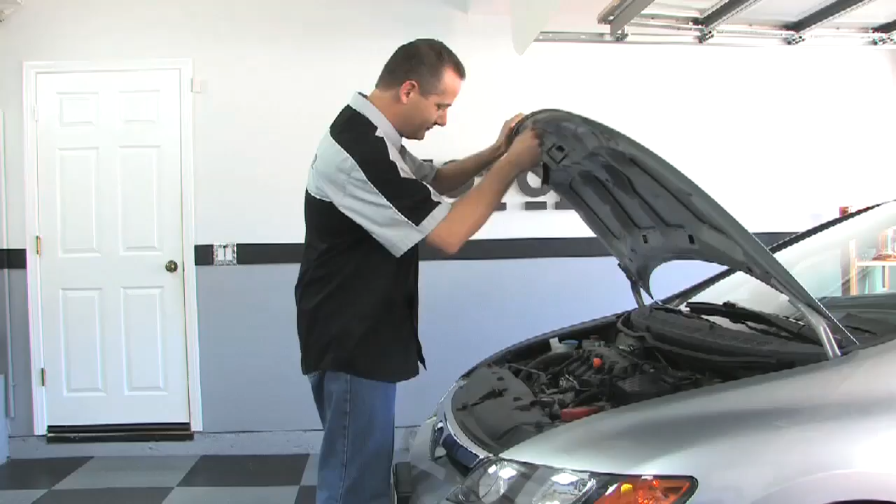Welcome to Motorz. Today we're going to be doing something a little bit different, focusing on the single most important part of your engine: your spark plugs. Yep, those little 3-inch plugs you rarely think about that make it all happen. Now you've got an engine and you've got fuel, but nothing gets done until that spark goes off, and then all the magic happens.

As part of your vehicle's maintenance plan, you need to change your spark plugs every 50 to 100,000 miles or so on most newer engines. This really depends on your ride, so you should check your owner's manual for the manufacturer's recommendation. Now we're going to take a look at a 2008 Honda Civic that has some miles on it and check its spark plugs to see if they need to be replaced.

There are some clear signs that a plug needs to be replaced or just needs to be cleaned, so I'm going to show you how to inspect a plug, but also clean it if it can be salvaged. We're also going to show you how easy it is to replace the spark plugs in your vehicle, so when it comes time you can save a little bit of cash by doing it yourself. This also may be a good time to upgrade with performance plugs. Now finally, we're going to look at some alternatives to the traditional spark plug, different metals and newer designs.

But first, let's pop the hood on our Honda and see what's involved in removing the current spark plugs. For the spark plug removal, the only tool you're going to need is a 13/16 or a 5/8 deep socket with a ratchet and an extension.

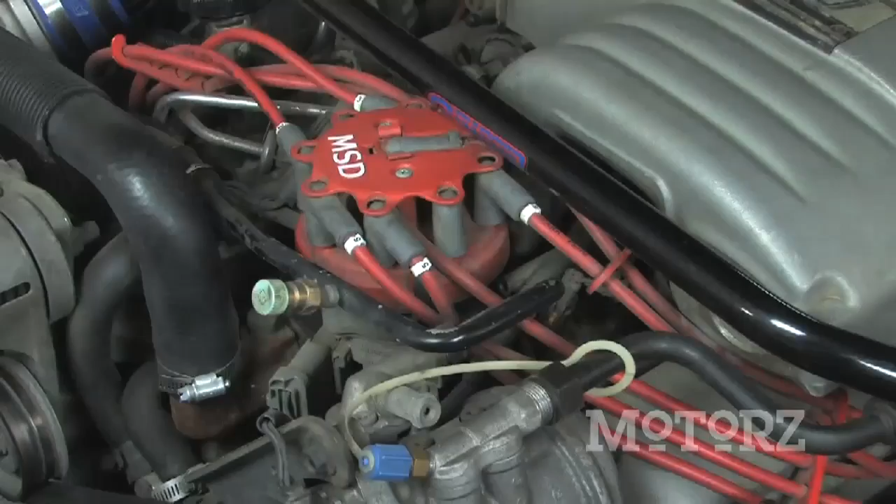Well, it looks like our engine's cooled down, so we can finally get to work. Now, if you have an older vehicle with spark plug wires and you have hard to reach spark plugs, then you might want to consider picking up a spark plug wire puller, just like this one. Or you can just wiggle your hand in and grab the boot, not the wire, and give it a good tug. It should pop right off. The puller is a great idea as it reduces the risk of damaging the spark plug wire.

Now if you're working on an older vehicle with spark plug wires, once you've got them off, take a look to see how much dirt, grime, and oil is around the plug. If it's real bad, just wipe it away. Just be sure to move it away from the spark plug cavity so that you don't risk tapping any of it into the chamber once you have that spark plug out. Another tip is to use compressed air to clean up the area. Just be sure to wear safety glasses.

Now in the case of our Honda Civic here, we just need to remove these 4 coils, and that requires the use of a 10mm socket with an extension. Once you have those off, you'll have direct access to the spark plugs.

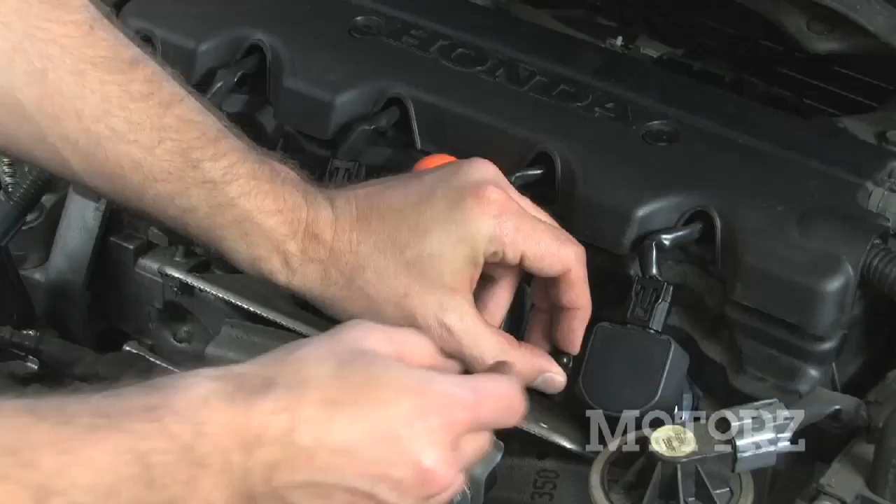Now to remove our coils from our Honda Civic, again we want to do them one at a time. We need to disconnect this wiring harness. Just press on the black tab, and that comes right out just like that. Next, using a 13/16, or in our case on our Honda, it's a 5/8 deep socket with an extension, you can remove the spark plug from the cylinder head by slowly turning it counterclockwise. Now, if you're in a really tight situation, you can also use a swivel joint to help you out.

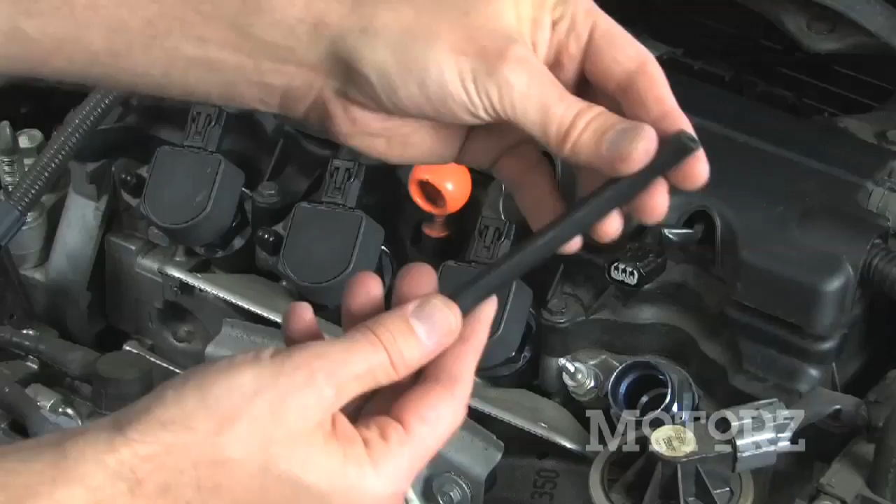Now, if your plugs feel like they've been seized into your engine or just real difficult to remove, grab some penetrating oil to loosen them up. Whatever you do, don't use a breaker bar or put a lot of force on it. If you do, you could cause a lot of damage to the head or the plug. Now for recessed spark plugs like our Honda Civic hidden beneath coils or an ignition coil assembly, you'll need to use a piece of rubber hose to grab them and pull them out.

Another tip is to put some electrical tape around your socket and extension just to make sure the socket doesn't pop off the extension and get stuck down into that cavity. Some sockets, specifically made for spark plug removal, include a rubber insert that helps hold on to the plug.

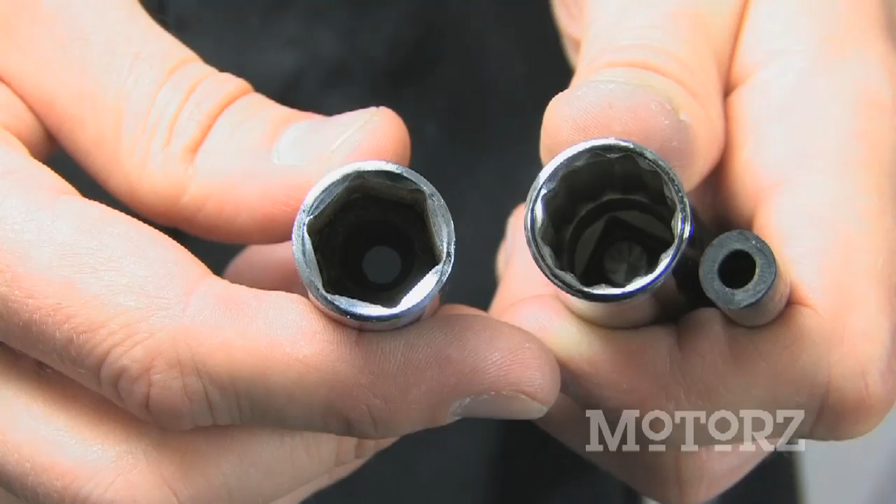Now if you're working with spark plug wires, keep in mind that you want to remove and replace one spark plug at a time. Don't get too carried away and remove all your spark plug wires at once. You need to make sure they all go back in the same place, because if you don't, your engine's going to fire out of order, and you'll have a fun time trying to figure out which ones went where.

If you want to be even safer, grab some masking tape and mark each one of the wires' locations before you disconnect them, or just grab a Sharpie and write the number right on the spark plug wire. Obviously we don't have to do that on our Civic.

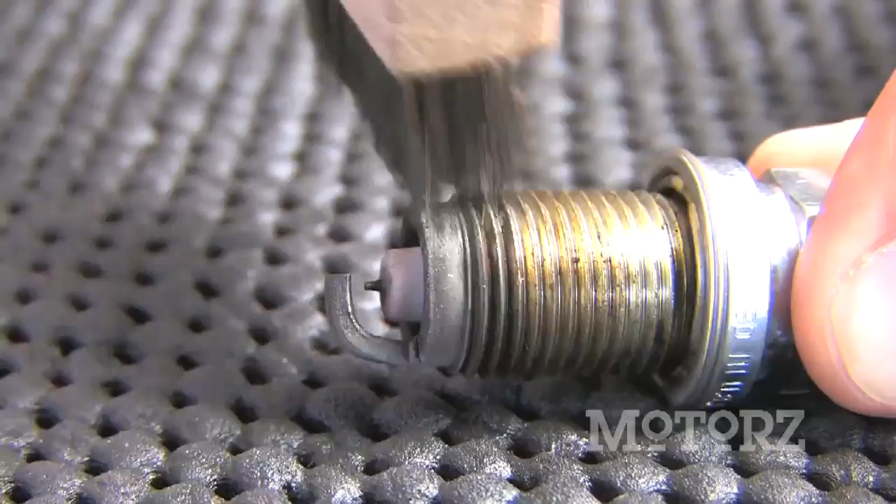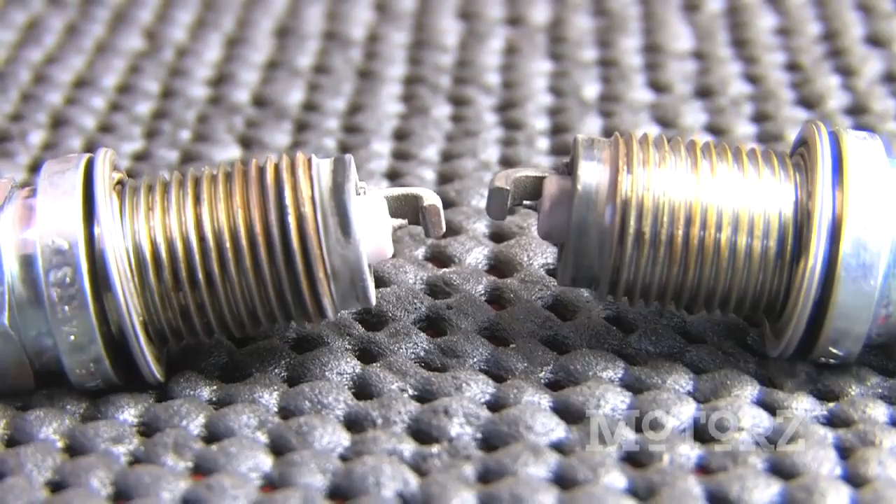Now grab a wire brush and clean off any of the grime around the ground electrode, the spark tip, and the threads. A used spark plug may be acting up just due to oil, fuel, and carbon buildup, and it may simply just need some TLC. If left this way, it can reduce fuel economy and engine performance, and you definitely don't want that.

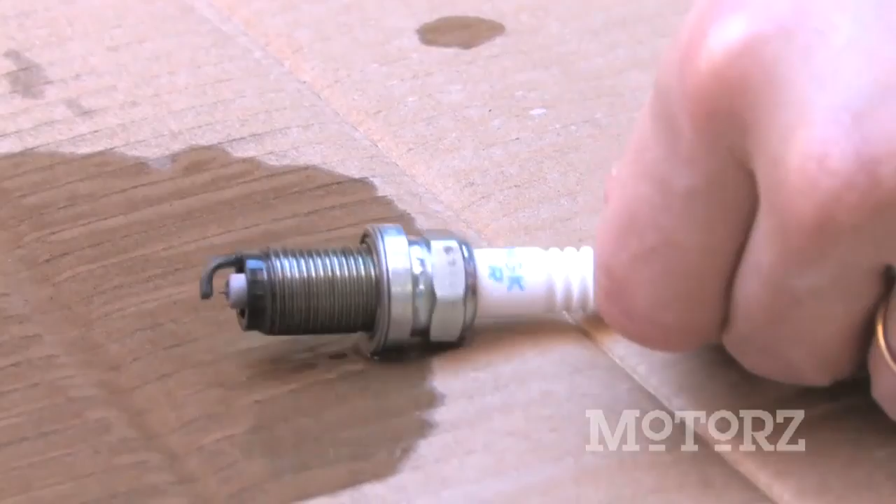Then grab some brake clean, put on some safety goggles, and spray it all down, removing all the loose debris and oil. Once it's cleaned up, you can inspect the spark plug for wear and tear. Just look at the electrode, and if the edges aren't sharp, like they're a little bit rounded, then it's definitely time to toss them aside and install a fresh set of spark plugs.

If on the other hand they still look pretty good, then you can probably reuse them and get some more miles out of them. But spark plugs really aren't that expensive, so you should always replace them.

Now before you put the used spark plugs back in your vehicle, check your owner's manual to find out if they should be gapped first, as some might not need to be gapped at all. Your manual should have the specific gap size information.

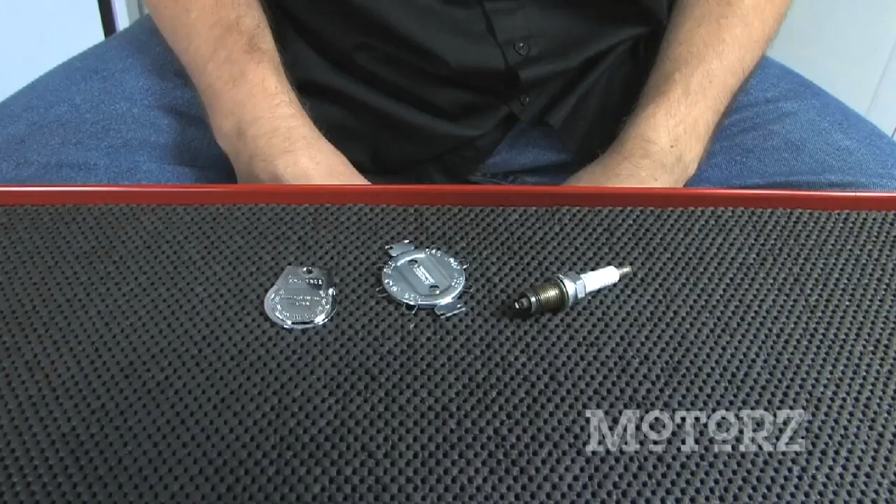There are two different tools you can use to gap a spark plug. There's this round one, and there's another one that has these wire hoops on it. Now with an iridium-based spark plug, like the one we just pulled out of our Honda, you'll notice in your owner's manual there's no gap size information because you don't want to gap this. So we've got another spark plug that we're going to use, an older one, for this test.

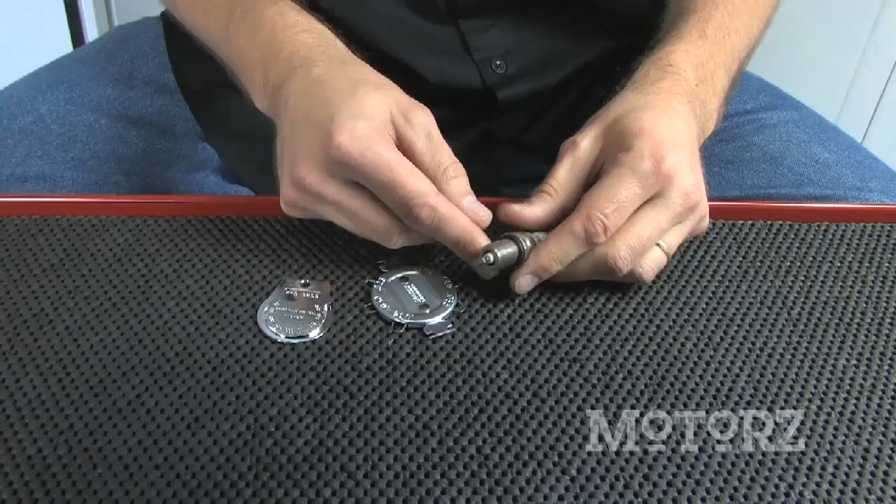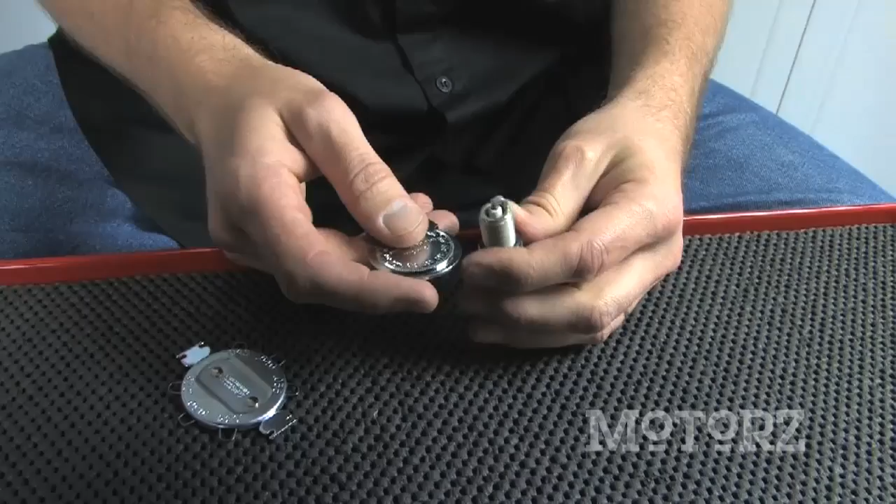To use this tool, you just insert it in the most narrow point of the wheel and turn it until it stops. Now if you want that gap to be open a little bit more, you just kind of push it and it will open up. And if you want to close the gap a little bit more, you just tap lightly at the end and then check it.

Now using this wire hoop one, we're going to take a look at the .035. What you want to do is put it in there and it should just grab with just a little bit of friction, just like that. Now if it's not happening like that, you need to close the gap again, just tap lightly on it.

You can also use this end of the tool to put it right on the negative electrode and twist it up. That will open up the gap, and you can also twist it the other way to close the gap. Of these two tools, I prefer this one because it has this gap tool where you can open and close that a little bit easier.

Now it's crazy to think that every year Ford, GM, Honda, Toyota, and all those guys come out with brand new models, and every few years they reinvent their vehicles and introduce new engines too. But one thing that's always remained the same is the spark plug. You'd think that someone out there would look at this 100-plus-year-old part and try to come up with something better, right? Well, this little guy right here has been around since the 1800s, about 150 years ago, when the first internal combustion engine was invented. This 19th century technology hasn't improved since then.

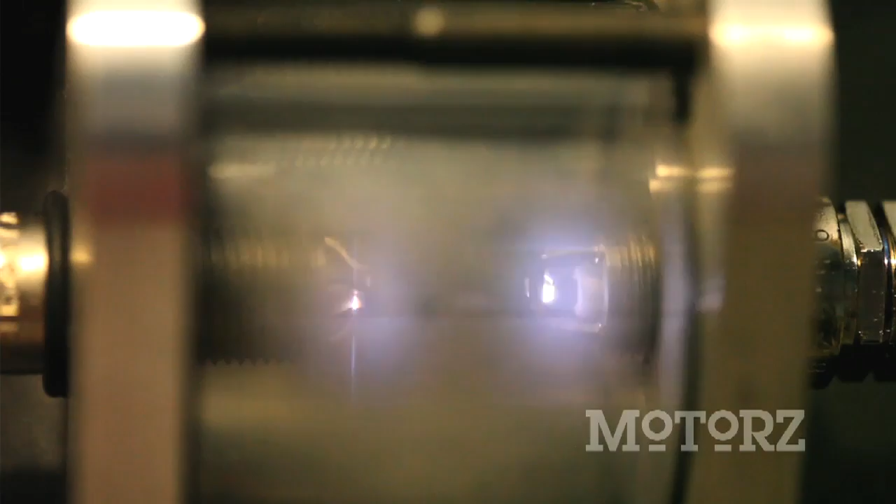Now, after inserting a traditional spark plug right here and an E3 on the other side, all you have to do is plug the test box into a standard 110 outlet and press the big red button. Now, looking closely, it's easy to tell that the E3 spark plug delivers a much larger and brighter spark, which means it's going to burn more fuel in the chamber and produce more power.

Now, how does that all work? I'm so glad you asked. So check this out. Over here on the right, we've got a traditional J-wire spark plug. Looks like that. And it's got the J-wire electrode that goes up like that. The way this thing fires is kind of off to the side like this. That's how its flame front develops.

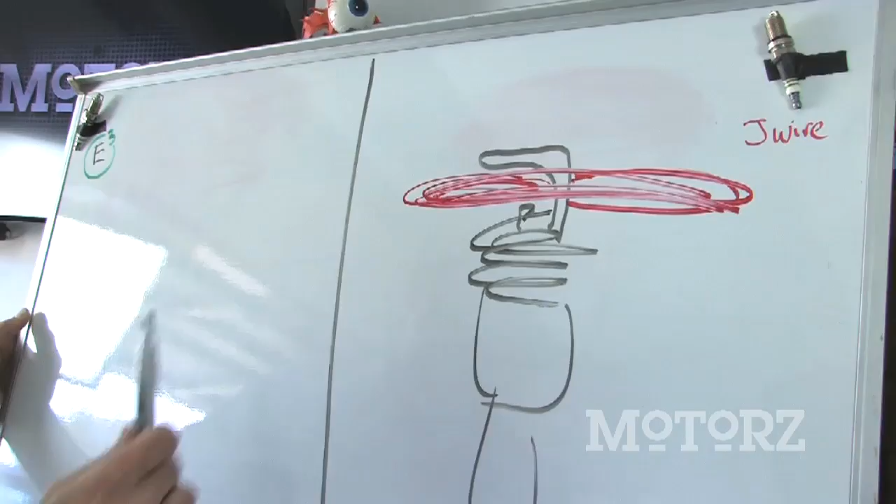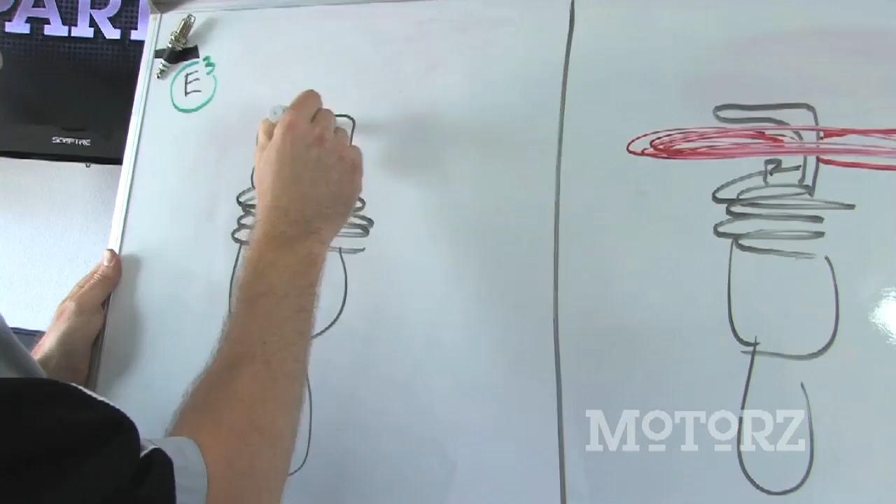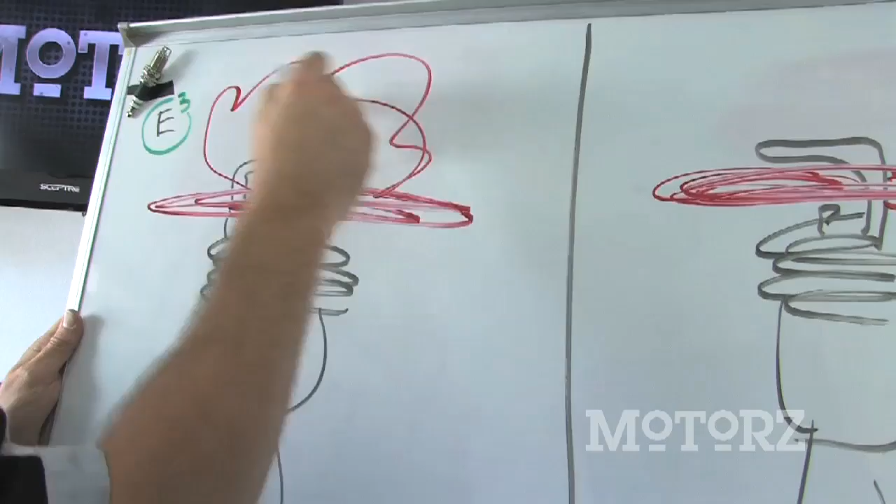Now, compare that to E3. Got the same kind of traditional design like this in the spark plug, but up on top, we've got more electrode action going on. And we have a similar plume that kind of goes out the side how it fires, but since it's not blocked right here in the center, it also fires straight up and creates this huge atomic bomb-like explosion that destroys all life inside your cylinders.

So here's what's going on inside. Your spark plugs have to ignite the air and fuel mixture, forcing your engine's pistons to move rapidly up and down the chamber. Each spark plug sparks about 25 times per second. So all this activity is happening rapidly, so as you would imagine, if your spark plugs are working faster, then you're going to see some improvements.

Now in the case of the E3 spark plugs, that quicker and faster burn ends up producing more pressure in the cylinder. So as a result, it gobbles up fuel a hell of a lot faster than a traditional J-wire spark plug. This translates into more power because of the higher cylinder pressure, lower emissions because none of that fuel mix is going to waste, and better fuel economy as a result.

And that is where the name E3 comes from. The 3 E's from energy, efficiency, and ecology. Now before you go start screaming, snake oil, let me tell you that there's some major university tests that have been performed on these plugs to disprove the doubters using multi-million-dollar state-of-the-art test equipment, and it's legit.

The E3 spark plugs first became commercially available in 2004, but before they started stocking shelves at auto parts stores with those little green boxes, they put nearly 10 years of research and development into them. So here we are now, about 6 years later, and E3 spark plugs are still being highly regarded in the industry and still flying off the shelves. This ain't no snake oil, son.

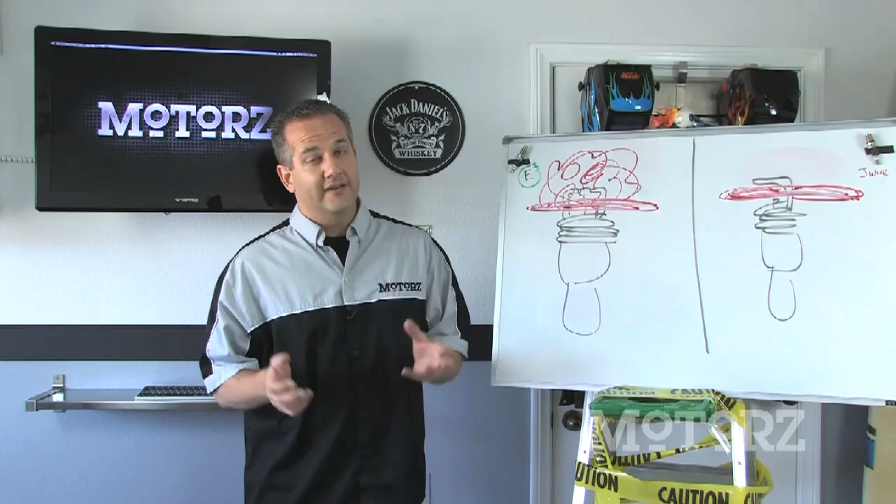Now, one of the reasons why they work so well is their diamond fire design of the plugs. They have sharp edges of the electrodes, and those are critical when it comes to spark plug performance. The sharp edges allow the electrons to fly around in the spark zone faster, colliding with matter to release even more electrons. With the diamond fire design, they call this forced edge-to-edge spark discharge, which is the best way to get a spark to leave a surface. In the case of E3 plugs, it forces all the electrons to work together to create a tiny plasma channel, which allows that spark to flow easier than a traditional spark plug.

Now, to further explain the engineering behind their technology, E3 teamed up with Michigan Technological University to conduct automotive research related to spark plugs and their design. Now, as you know, I'm from Southern California, and this time of year, it's still a bit frigid in Michigan. Too cold for my liking. So E3 teamed up with Stacy David from Gears, who made the trek to the university to find out the scoop on what the schools found out about E3's technology. Take it away, Stacy.

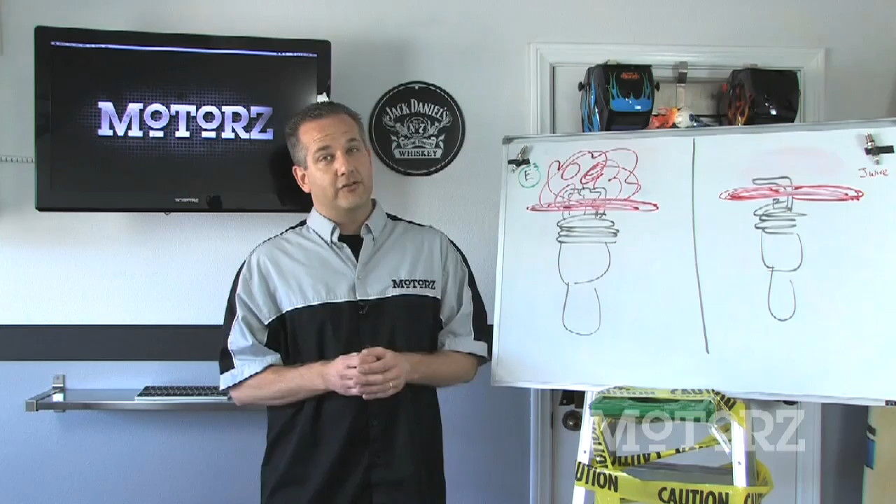Seen at grassroots motorsports tracks around the country, E3 spark plugs is quickly becoming a recognized brand in the automotive world. The E3 spark plug is based on a patented unique design called Diamond Fire technology that provides more power, lower emissions, and increases efficiency. E3 is known primarily from race series and other involvements we have from a marketing perspective, but really our company is founded in R&D. We started testing back in the late 90s and we're continuing to test today. We decided to team up with Michigan Tech because of their tremendous facilities and because of the great reputation they have throughout the country for producing some of the best engineers, as well as some of the highest level academic testing in the industry for our type of product.

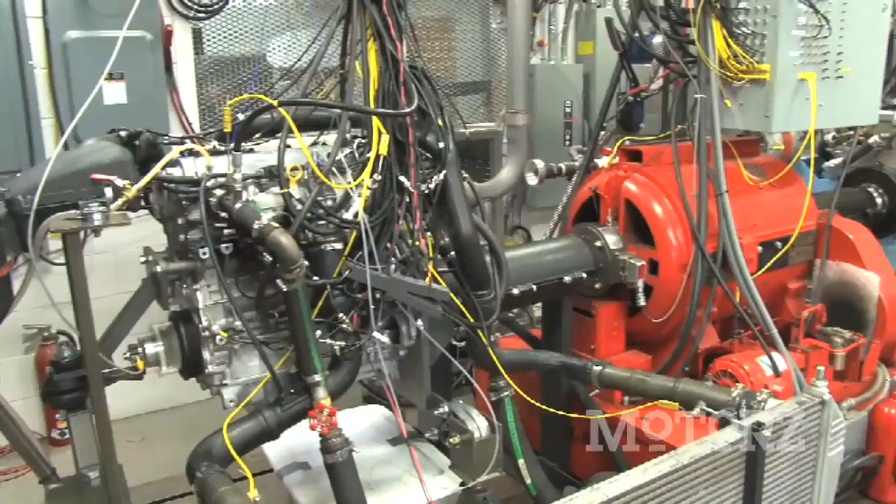Michigan Technological University is a nationally acclaimed automotive research facility committed to addressing some of the most difficult environmental issues of our time. The caliber of talent coming out of the university is staggering. Michigan Tech does about $60 million of research every year in a whole variety of disciplines. And that's one of the key things: our students have a 90% success rate in finding a job in their discipline within a few months after graduation.

We think one of the keystones of a Michigan Tech education is hands-on training, what we call experiential learning. You can be in a lab, you can be in a car, you can be in a snowmobile, you can take part in all kinds of activities. It's not just theory and classroom work, and it's not just in a controlled situation in a lab. You can do all sorts of things and interact with people from all kinds of disciplines. It's not unusual at all to have a mechanical engineer and a business major working together on some sort of project.

Part of the E3 testing effort, we not only wanted the affiliation of a nationally acclaimed research facility like this, but also the advice and input of key industry personalities. Veteran automotive engineer Jim McFarland and TV personality and host Stacy David of Speed TV show Gears also joined us.

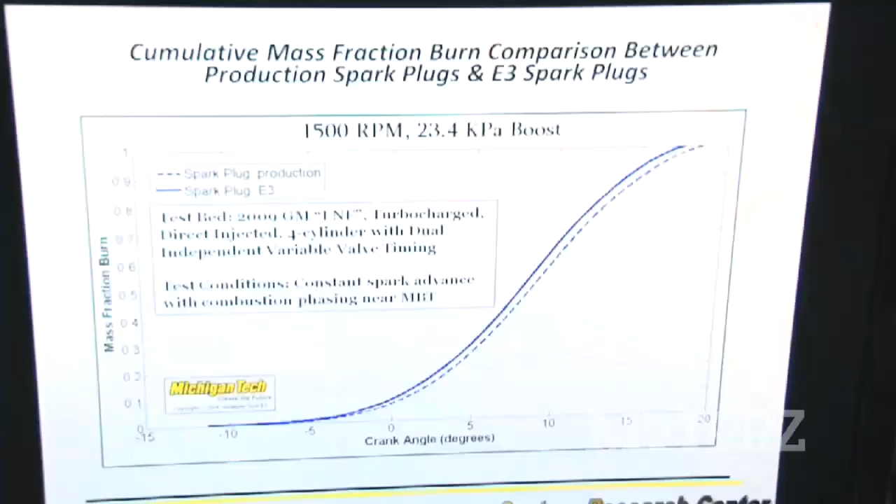Jeremy, this is a little different than a regular dyno that I've seen. What are we looking at here, man? What the early burn duration translates to is the stability of the combustion process. By making that early burn more stable, we can run more dilution in the cylinder, and that's directly translatable to fuel economy. As these test protocols develop over the next few months, more of this kind of data will translate into the increased power and torque that people normally relate to. Yeah, absolutely. I'm really excited.

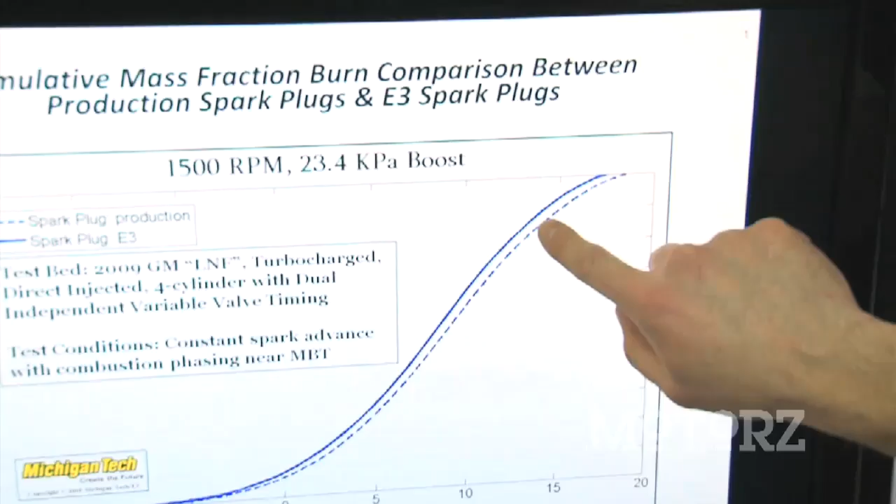We've run some preliminary results so far. The results, as you can see here, are very encouraging, and I'm excited to continue testing both at full throttle as well as start to look at some of the part load effects.

Now that we've seen what the dyno has to say, let's see what the combustion chamber test concluded. Oh yeah, we're going in here. Oh, this is awesome.

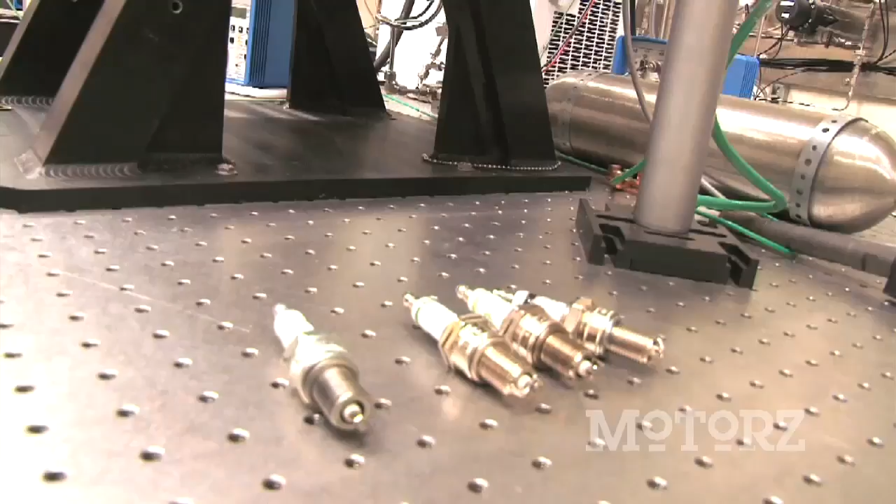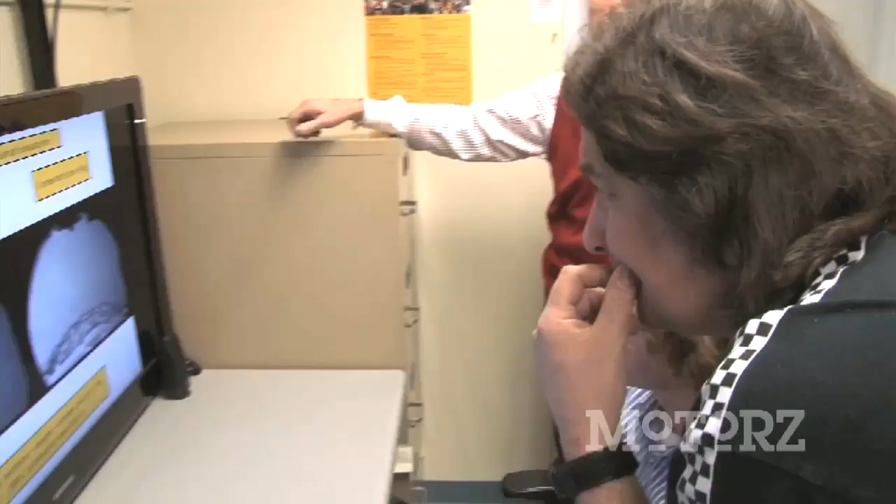Now, Jim, why do these look so different? What's going on in there? Well, Stacy, the E3 technology is allowing the burn to progress more rapidly, and the images there will show you. Chris, if you can go back and show the progression. Stop it right there, if you will, please. You can see the amount of turbulence and activity going on there, as well as the speed, so the burn rate is much quicker. Essentially, you're burning more of the fuel that's there in the same period of time, and that's what translates into more power or lower emissions or better fuel economy.

And this is the same time of the burn on both of them, right? Correct, exactly the same time. Wow. So all this burn that's going on up here, that's, like you say, at this point, that's more power, that's more economy? Actually, you're burning more of the fuel quicker, so you're producing higher cylinder pressure, which translates into better fuel economy and more power.

And why is this growing so quick? Is that because of the little cage design? Well, again, what we'll call the E3 technology creates that more rapid burn. They're starting at the same period of time, but you can see the flame rate progresses much more quickly. Wow.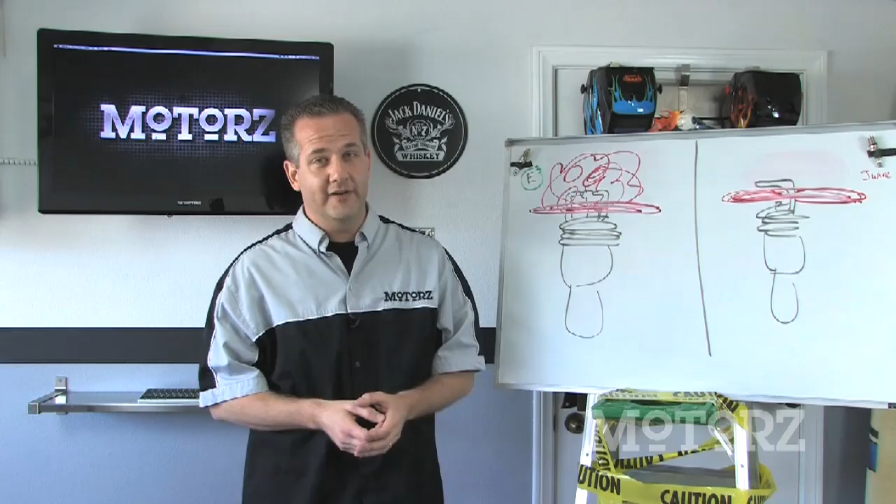Thanks Stacy and the engineers at Michigan Tech for walking us through the engineering side of E3 spark plugs. Those guys sure do know their stuff. Now, as you know, we're a DIY show, so now that we know why E3 spark plugs are better, let's get back to our vehicle in the shop and finish up our installation. Did you really think there was so much history and technology behind something as simple as a spark plug? It's incredible. But enough yapping, let's finish up and install our new E3 spark plugs.

Now, one final thing before you install your new plugs. You want to put the new ones side by side with your old ones to make sure they're identical. If they look any different, double check that you bought the right ones before continuing.

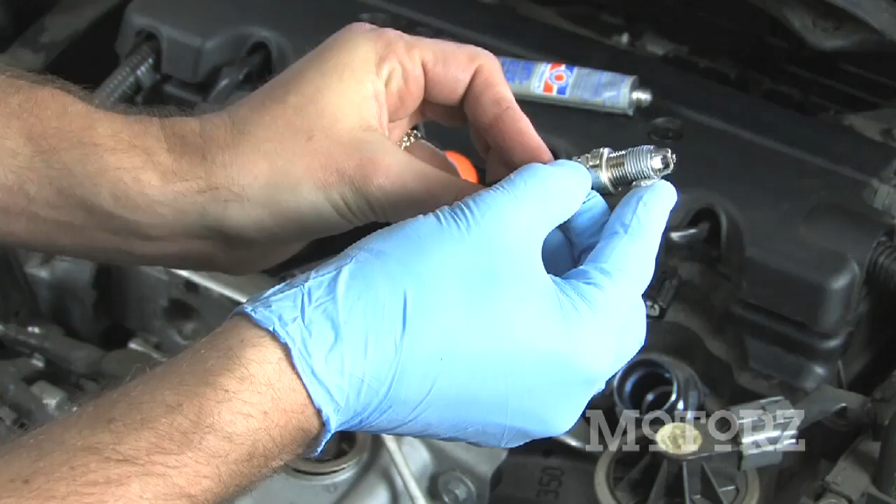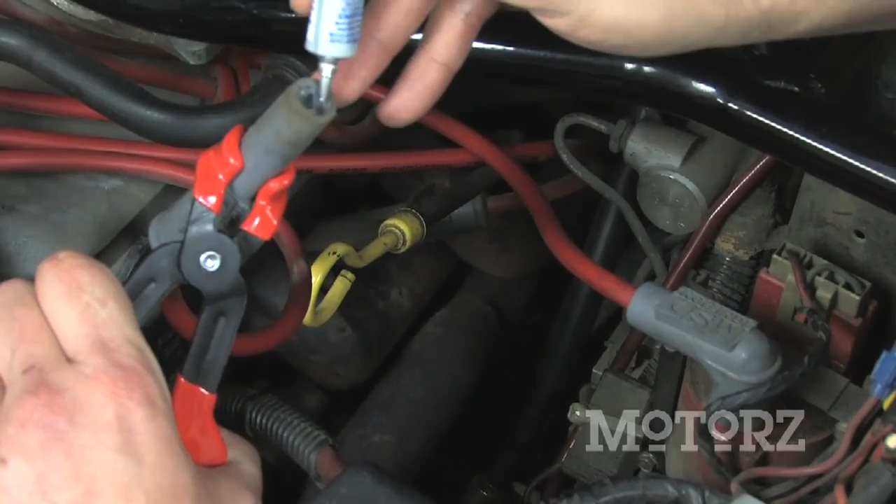Now you can prep your plugs by putting some anti-seize around the threads to prevent galling and seizing. If you've got an older vehicle with spark plug wires, it's also recommended that you put some dielectric grease inside the tip of the boot. This helps create a seal between the spark plug and the plug wire's boot, and it helps keep the boot from tearing during future removal, as it can stick to the porcelain insulator. If you're installing new spark plug wires, check them out because the boots may have a bit of grease in there already. Next, simply insert the new plug into place, then hand tighten so that they are snug.

Don't use a wrench just yet. Once they are snugged down by hand, grab your wrench and, holding it close to the socket, not near the end as you may over torque it, give it another 1/16 of a turn. Be sure not to over tighten or under tighten them.

Once you've changed all your spark plugs, be sure to remove any tools from your engine compartment and any masking tape if you used some to mark your spark plug wires, then fire up your engine. It should sound better than ever before. If it is sounding worse, turn the engine off and let it cool down. After it's had time to cool down, check all your spark plug wires again to make sure that they're seated correctly onto all of your spark plugs.

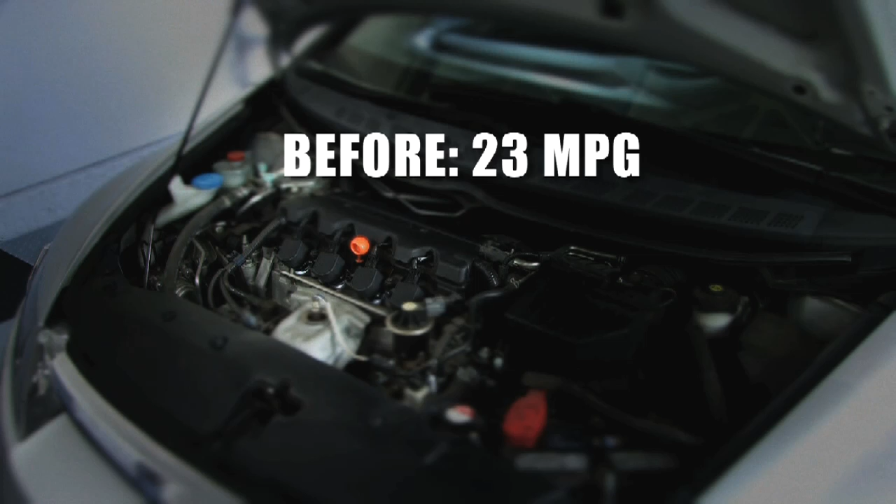Now check this out. After driving the Civic with a new tank of gas, we noticed a huge increase in gas mileage. The Civic got 23 miles per gallon prior to the installation of the E3 spark plugs. Now, after driving the vehicle for 323 miles, we saw an average of 27 miles per gallon. That's a 4 miles per gallon improvement just for changing out the spark plugs. With that being said, please note that this test was not conducted by any scientific means other than using the vehicle's computer, and your individual results may vary. Still, this is an impressive difference that we just weren't expecting from switching to E3 spark plugs.